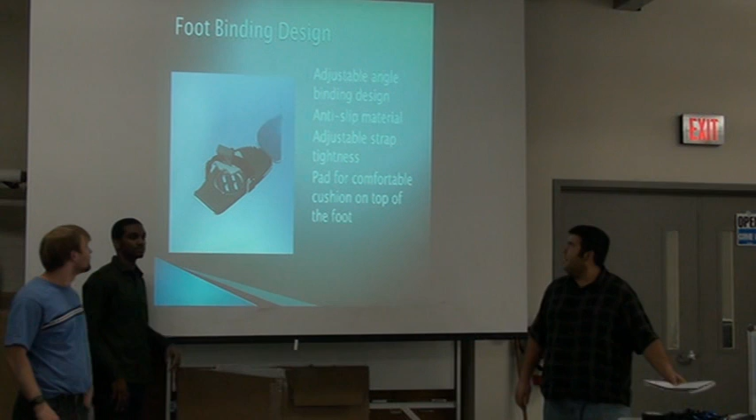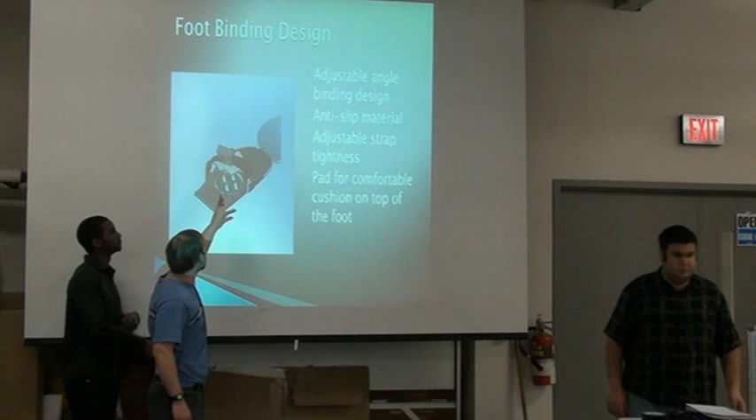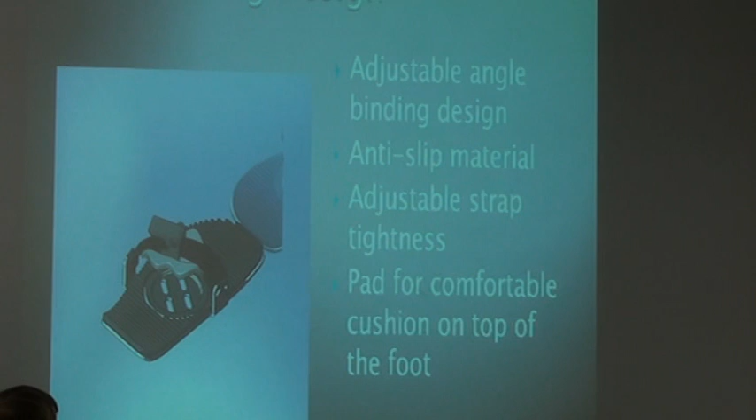What's your name? Alright, so this is our binding. That was the original SolidWorks model. We bought the strap and the buckle and all the material for the anti-skid padding for the base plate. We used an adjustable angle binding so that we can tighten the strap, and it should be long enough to suit people for any different foot size.

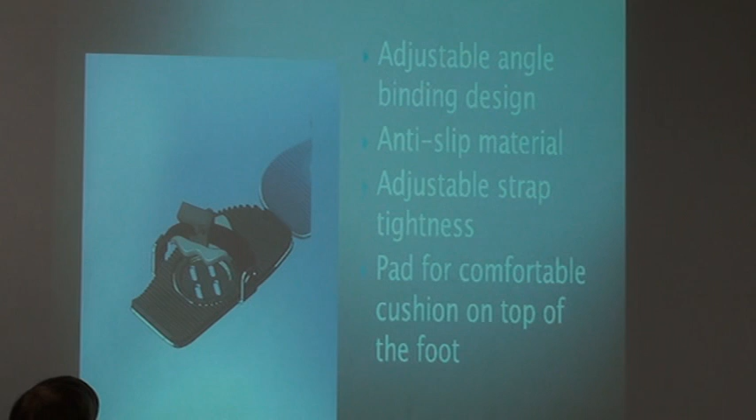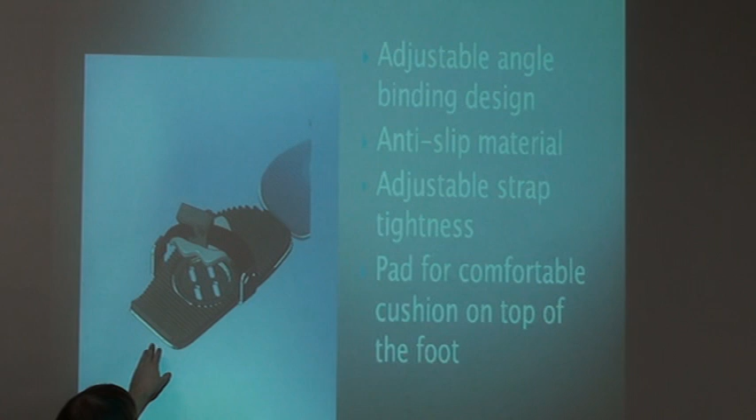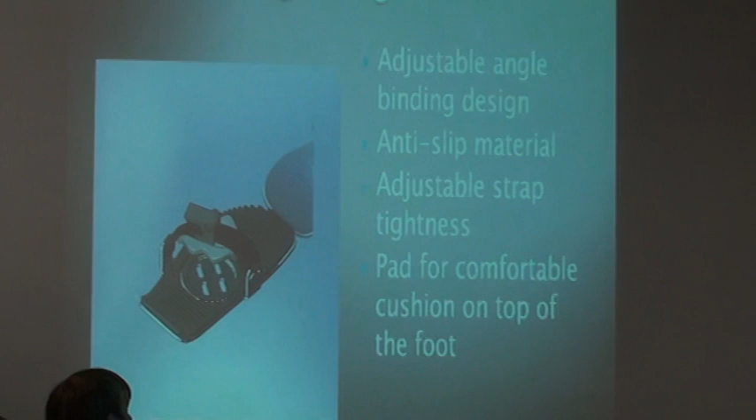We don't have any padding for cushioning right here, but the anti-skid material is close to what they use in a real skateboard. And we made the base plate from 1.45 millimeter stainless steel sheet metal thickness with the bending machine, and laid the anchor plate. So the base plate is made out of stainless steel.

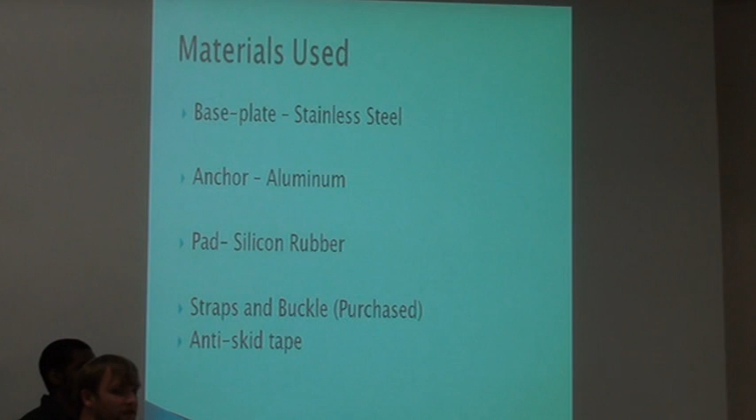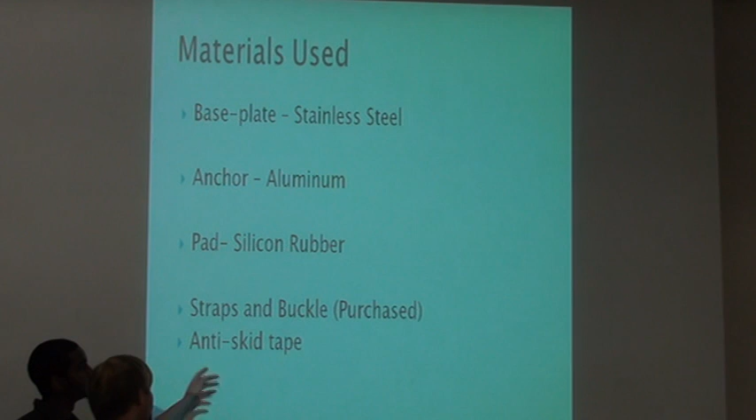The anchor plate was made out of aluminum stock, which was the same stock that was left over from making the wheel design that Steven made. The base pad we made out of silicon rubber using a mold that was rapid prototyped based off of a SolidWorks part design. And as we said, the straps and buckle were purchased, as was the anti-skid tape.

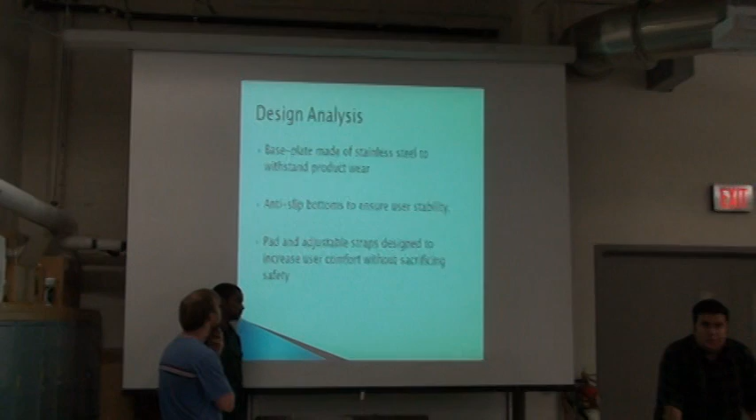Alright, for our design analysis, we wanted to get a base plate made out of stainless steel in order to withstand the product wear, and it was really tough and hard to break. I know that personally.

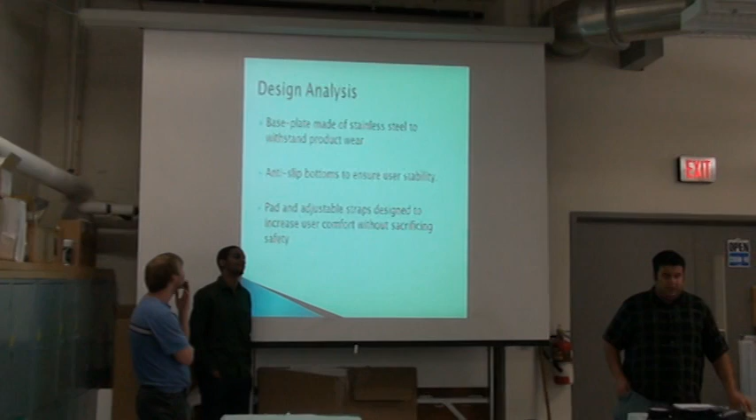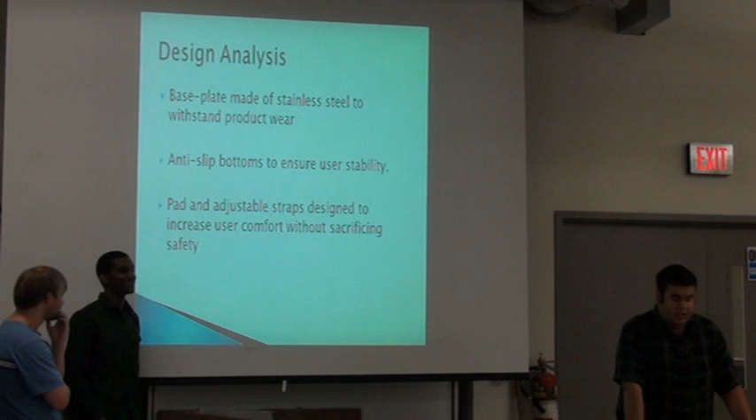And we had anti-slip bottoms, which turned out really good. We just taped them on there, and it ensured stability and made sure, hopefully, we can still get the anchor to turn on it, and the anti-slip won't interfere in that. And we have a pad and adjustable straps, so it should still be comfortable and safe. So that's all pretty good.

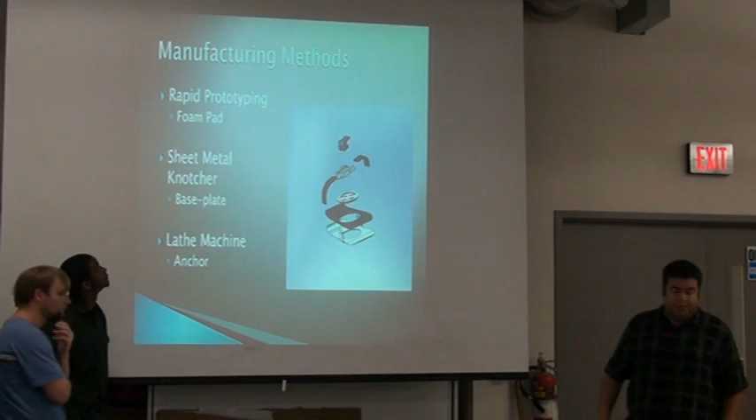For our manufacturing methods, we rapid prototyped, well Adam did, on SolidWorks, a mold, and we rapid prototyped that. We were working backwards from what we normally did in 216. We filled the cavity with rubber, so when you pull that off, it should be the pad that goes on top of your foot. It's the same silicone rubber material that we use to make the molding in 216 for our keychains. So it's kind of working the opposite way.

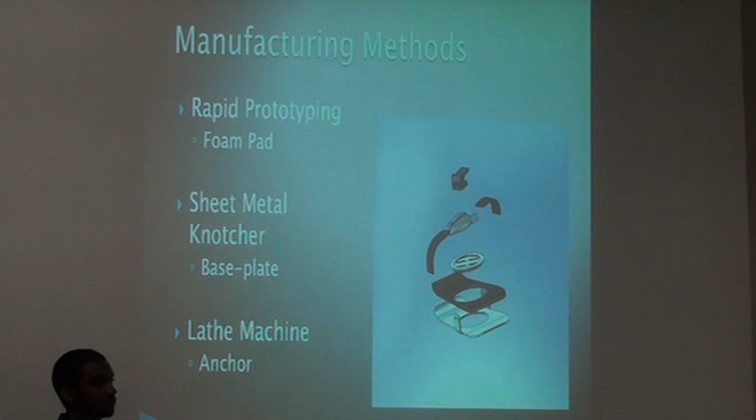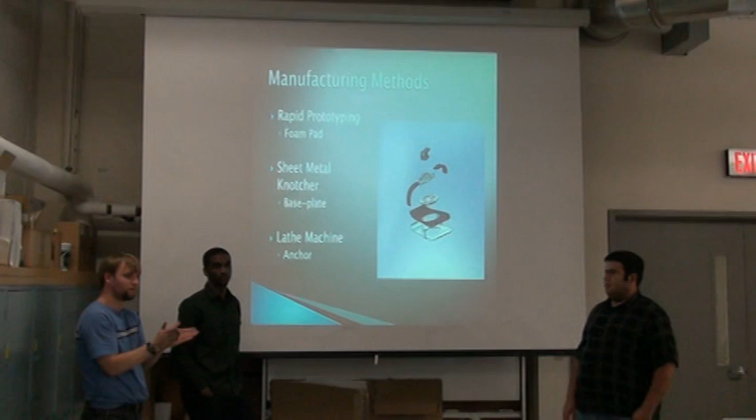For our sheet metal, we just took the metal, went over it with a marker to outline how the base plate should be, and went to the notcher to cut that out and curve it. Then we took the Dremel and went around the curves and formed them more nicely to make it look better. The notcher was that kind of machine with two large metal plates formed at a right angle. You pull a lever and it shears straight through the sheet metal. So it's good to make corners and straight lines, but you have to really do it several times to make curves.

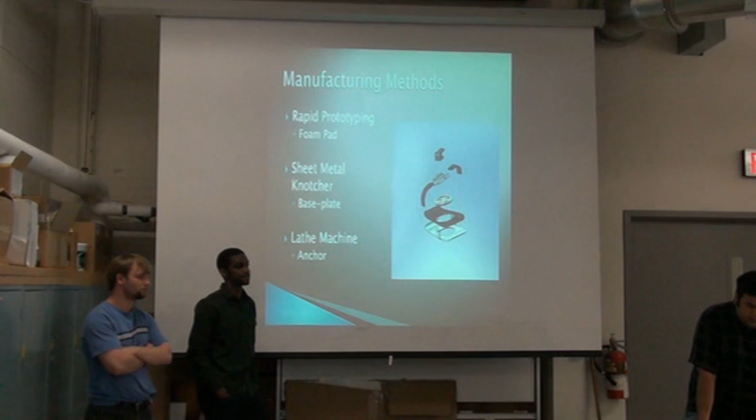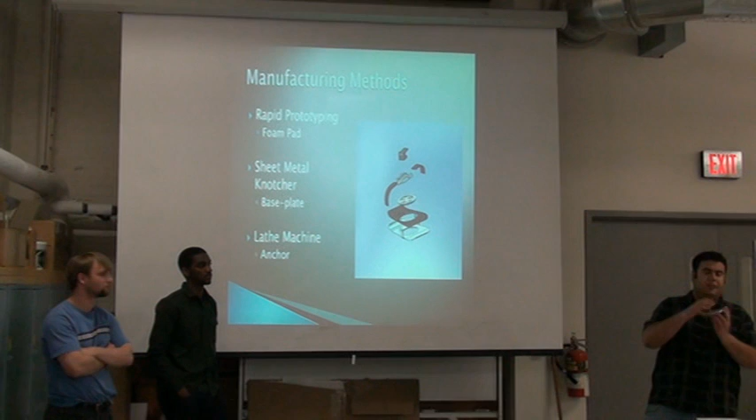And today we actually got the anchor finally finished using the lathe machine. The only thing we have left to do is figure out a way to make it flatter, just so it doesn't stick out so much. You got something bulging near the center of your foot.

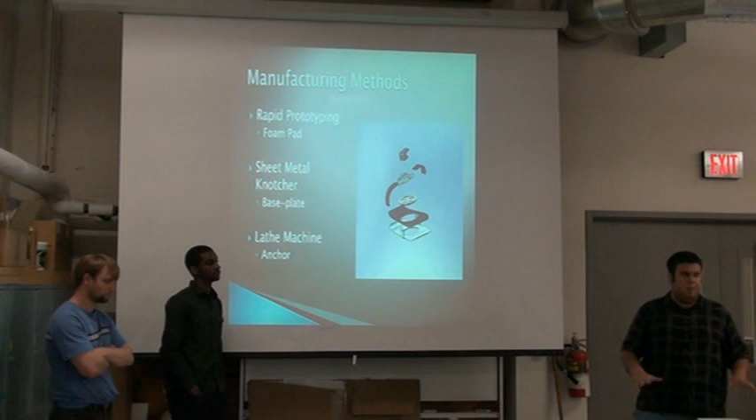As for the straps and bindings, we have them, we purchased those, so basically that's all our main pieces. We just have to assemble them.

And just thought I'd throw that in there to look nice. That's the G-code we used to make a 3-inch circle. Right on, yeah, that was a G-code used for making the circular hole. Yeah, it's actually big.

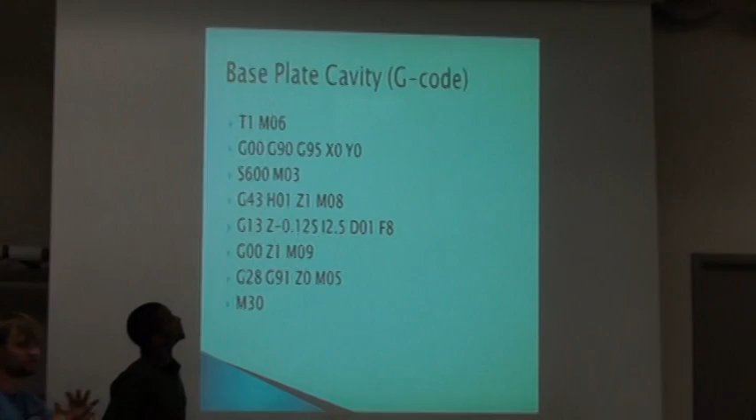The other group have pages of G-code. This is our pride and glory.

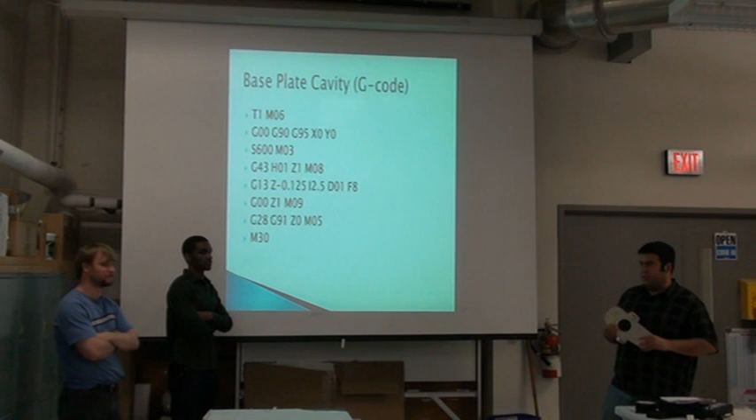That hole is actually very difficult because sheet metal is evidently not well suited to being used on those milling machines at all. We struggled a lot with this because it's harder than most tools usually cut. We used a Dremel to go around it, got about 2 inches, and the actual grinding wheel just disappeared.

We couldn't use G-code to make the periphery of the sheet metal because we couldn't hold it down tightly enough to make the edges and ends. When we tried to make that circular hole, it wasn't tightened enough. There weren't enough clamps on the base plate, and the whole thing jumped and considerably damaged the $80 tool on the CNC machine.

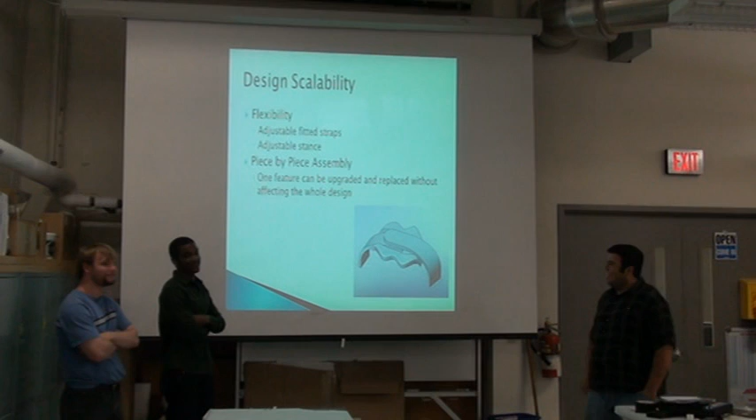One of our difficulties. As far as design scalability, we tried to design the product to be as flexible as possible. We had adjustable fitted straps for comfort, depending on the use of the adjustable stance. You can angle the base plate on the floor whichever way you like. With piece-by-piece assembly, you can take the whole binding apart and have each individual piece by itself, which is good if you see room for improvement in one piece, so you can go back and replace pieces later if you see a chance for an upgrade.

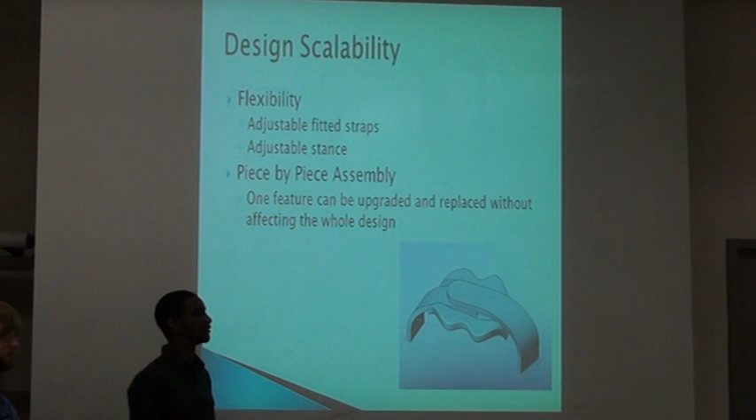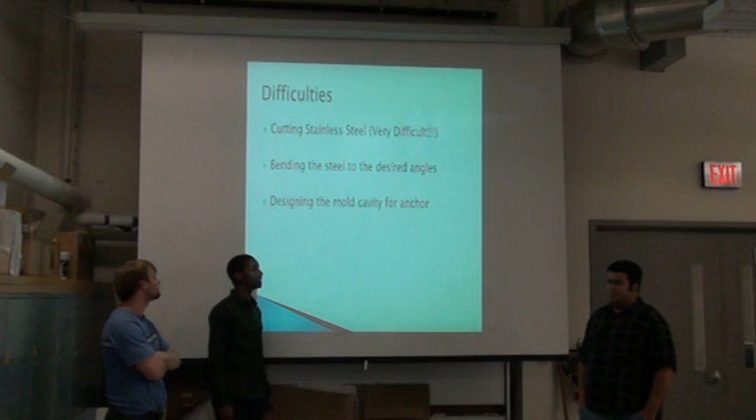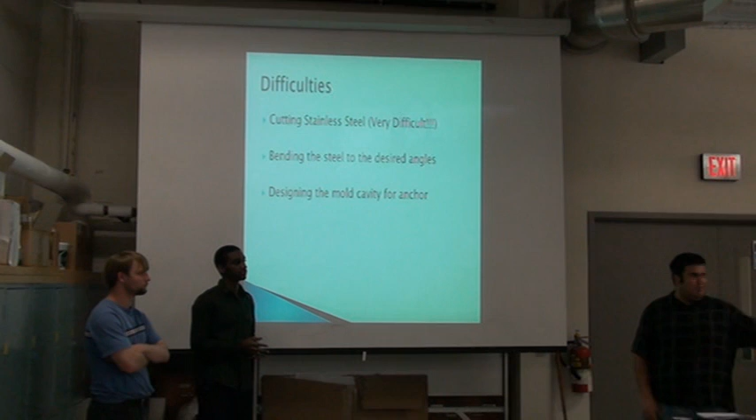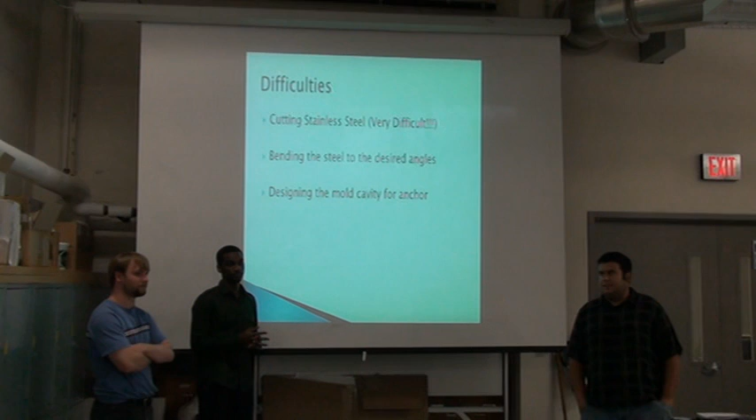Difficulties included cutting the stainless steel, bending the steel to desired angles on the bending machine, and designing the mold cavity for the anchor on SolidWorks. A lot of it was clamping everything — we had to figure out ways to clamp them on all the machines, which was pretty hard. Just getting the fixtures right was difficult too. We had a lot of trouble figuring out how to cut out the pieces for the base plate; it took all three of us to use a notcher to cut through the sheet metal.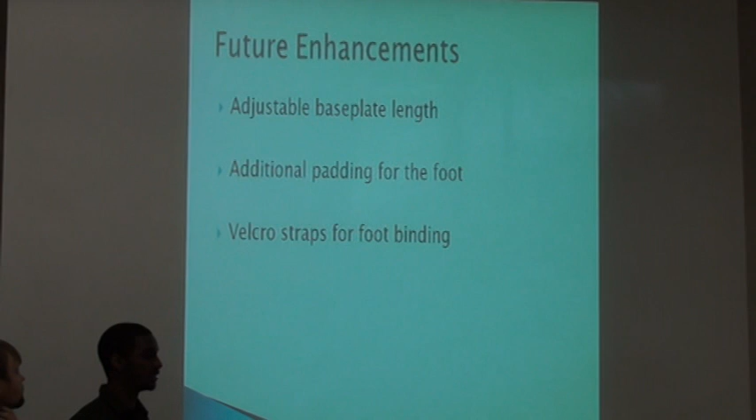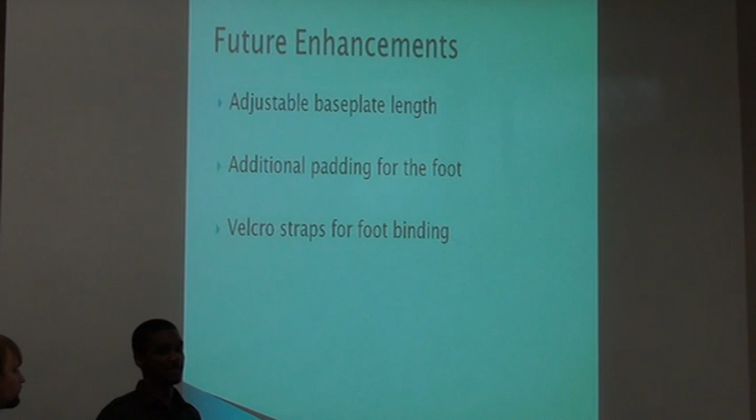For future enhancements, we're looking at an adjustable base plate length, so depending on foot size you could extend or shorten the base plate. Additional padding for the foot would help too — right now the only pad is on top, with none on the side where the straps come down. Velcro straps would also be easier than buckling and loosening the strap every time you take the shoe off.

In conclusion, we learned the importance of communication within the group, dividing out who's doing what and when. Outside the group, we collaborated a lot with the board group as far as where holes would go in the board and the base plate. We also learned the importance of teamwork — nobody in the group is greater than anybody else, so everybody had to pitch in and do their part.